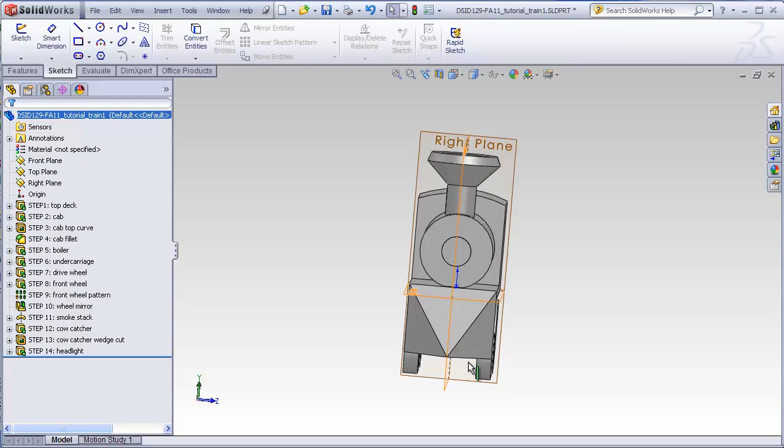This exercise was also designed to introduce you to some options available in these different basic features that you may not yet be familiar with. For example, we're going to take advantage of the fact that the train is symmetrical and build one half of it so it sits in front of the front plane and the other half so it sits behind it.

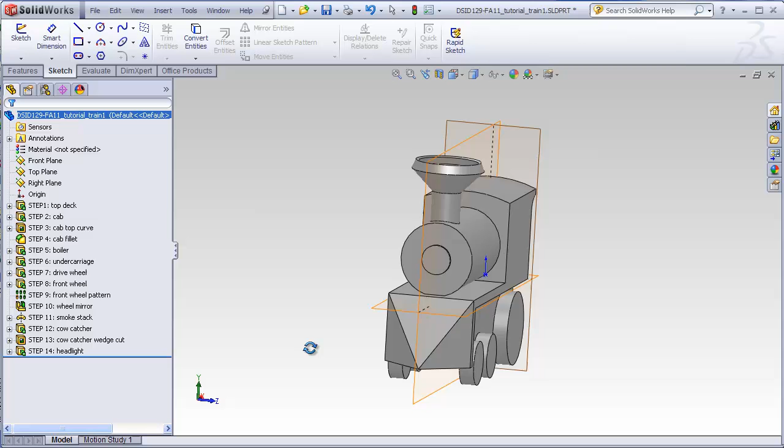This will conveniently allow us to use the front plane as a mirror plane when it's time to make a mirror image of the wheels. To be able to do this, we will have to be using some extrude options that up to this point we have not yet used.

In order to allow us to extrude automatically in 2 different directions, the entire exercise comprises 14 different features, which we could probably do in fewer features, but this exercise was designed to break it up into this many features in order to introduce some key concepts.

Using the rollback bar, I will quickly introduce each step and then go back again and show them in detail.

The first feature is what I'm calling the top deck, and this is a simple extrude with the sketch being made on the front plane. We'll be using a feature called midplane extrusion that gives us an extrusion going in both directions.

The next feature is also an extrude for the cab. This will also go in 2 directions, but we're going to use an option called up to surface to guarantee that this face of the cab lines up with this face of the deck.

And this face of the cab lines up with this face of the deck. The next feature is this top curve, which is made with a cut. It has a unique feature built into it. And then the overhang of the cab has a simple fillet.

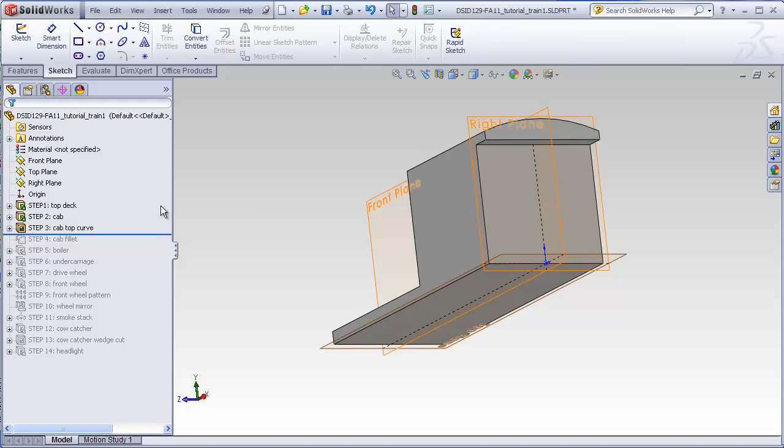The boiler is nothing more than a simple extrusion starting on this face. And then we add another midplane style extrusion to represent the undercarriage.

Extruded from the undercarriage will be a drive wheel and a front wheel, and then we'll pattern this front wheel to get a second wheel.

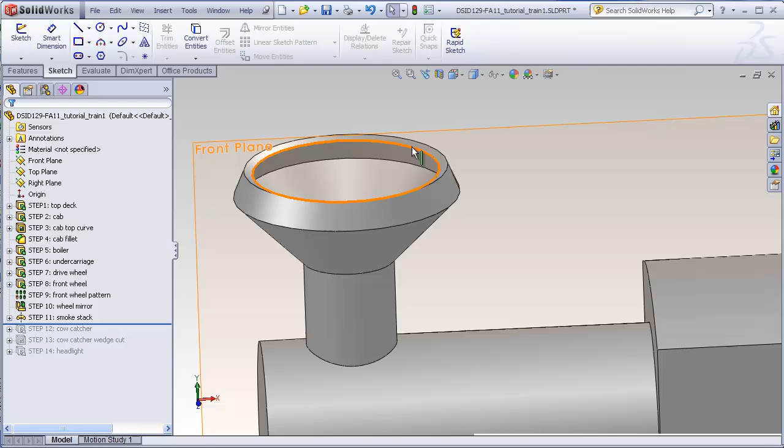All 3 wheels will be mirrored to the other side of the train using the front plane as a mirror plane. The smokestack will be added as a revolve, and what's unique here is we'll use the thin wall option for the revolve in order to create a hollow smokestack.

A cow catcher, a wedge shape, will be added to the front using again the up to surface option. And then from the top we're going to do a cut in order to add this wedge from this viewpoint, and then we're going to finish it all off with a simple extrusion off the front of the boiler to create a headlight. Now let's go back to the beginning and see how each of these were done.

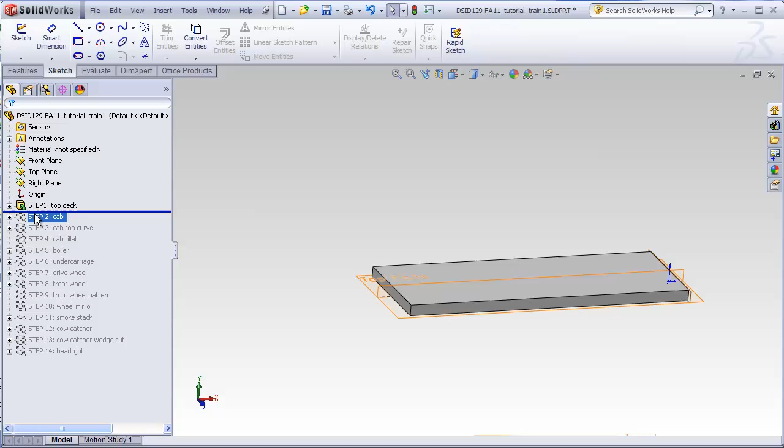The top deck is a sketch drawn on the front plane. This lower corner is aligned with a coincident relation to the origin. You can see in the highlight here that this extrusion is going to be going in both directions.

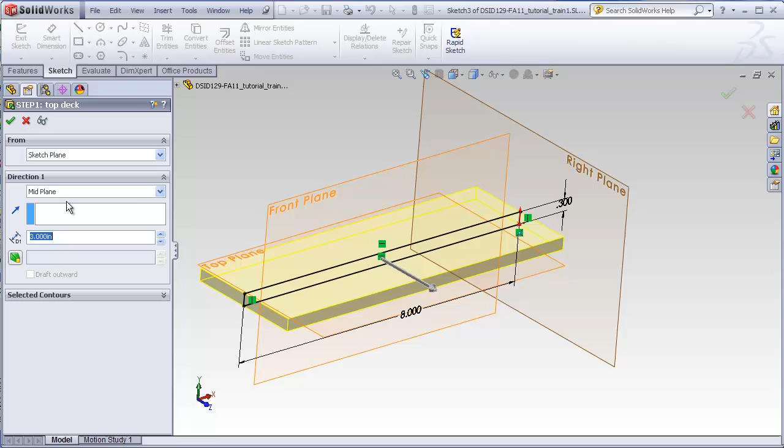Let me show you how that's done. Normally we're used to using a blind extrusion that goes just in one direction. What we're going to do instead is use the midplane option, 3 inches wide, and what that does is extrudes one half of the extrusion in one direction, one half in the other. So the total will still be 3 inches, but one half will go in this direction and one half will go in this direction.

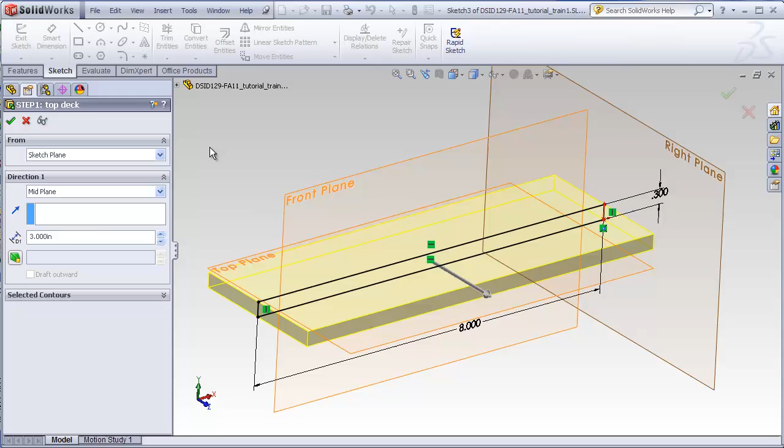The cab is also drawn on the front plane. We want to make sure that this lower corner has a coincident relation to the upper corner of the deck to make sure that these are always in contact here and here.

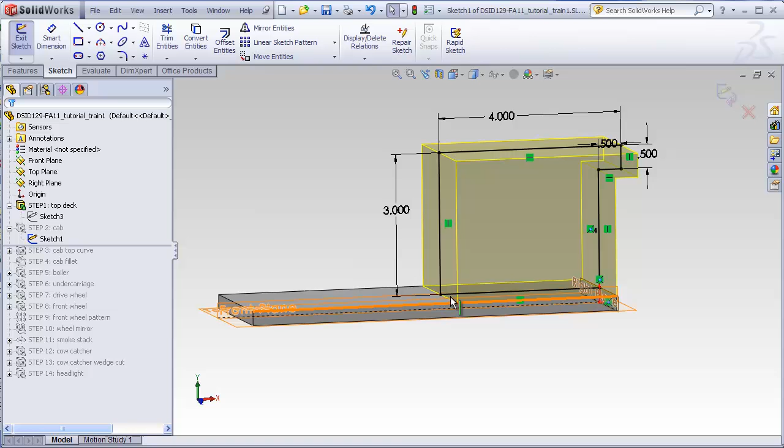One thing you want to be careful of is not to accidentally introduce a midpoint relation right here with respect to the deck, or it will make your dimensions create an error.

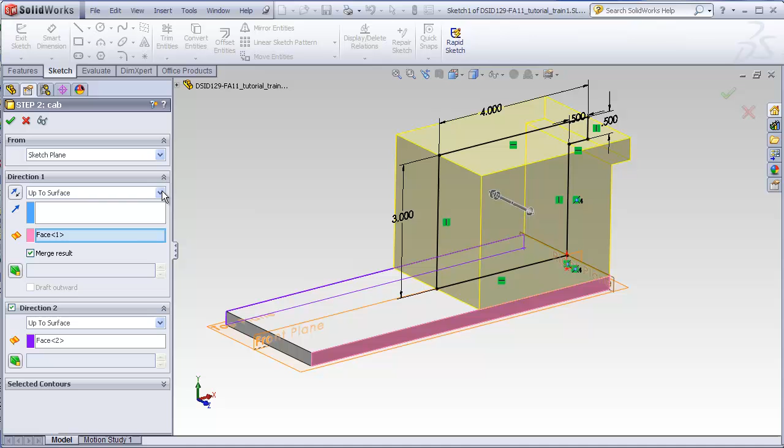Now instead of using the midplane option here, first let me show you what the blind option looks like.

What we want to do is extrude this up to this surface here, and extrude in a second direction going to this surface here. That guarantees that no matter how wide the deck is, the upper cab here will always be the same width.

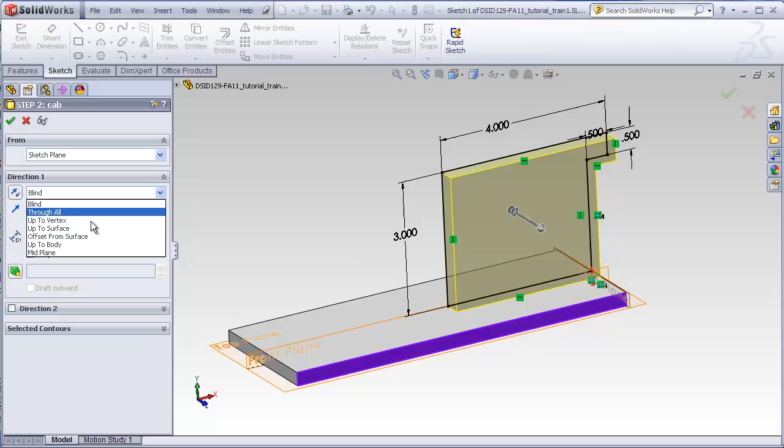Once again, we'll take it out of the blind option. In this case, we'll go up to surface. We're going to select this surface of the deck. We see that now the cab is going right up to this surface regardless of what this dimension happens to be. Here we see only half of the cab has been created.

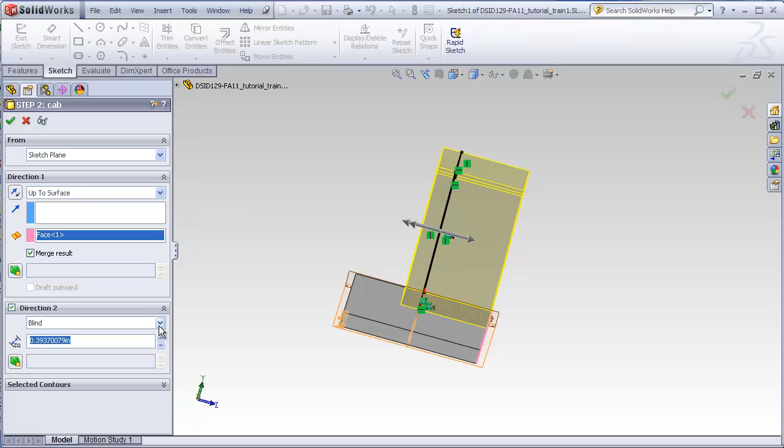The normal default is to keep direction 2 turned off. We're going to check direction 2 to activate it. It defaults to blind also. We're going to change this to up to surface, and we're going to click on this surface of the top deck in order to make sure that this side of the cab is also in alignment with this side of the deck.

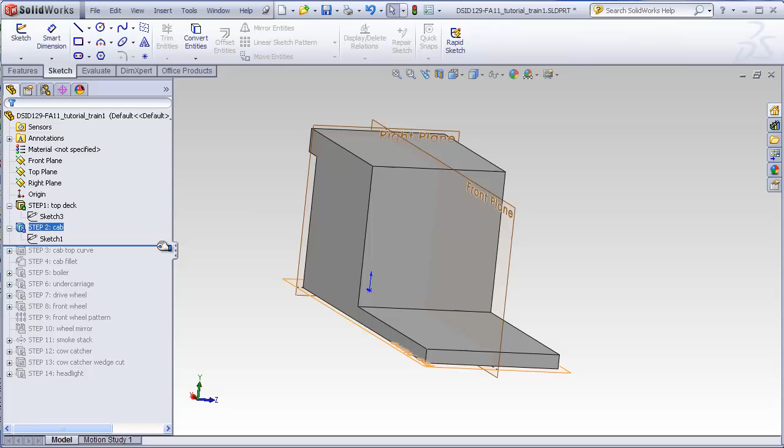The next feature is cutting away this top curve. This is pretty straightforward with one exception.

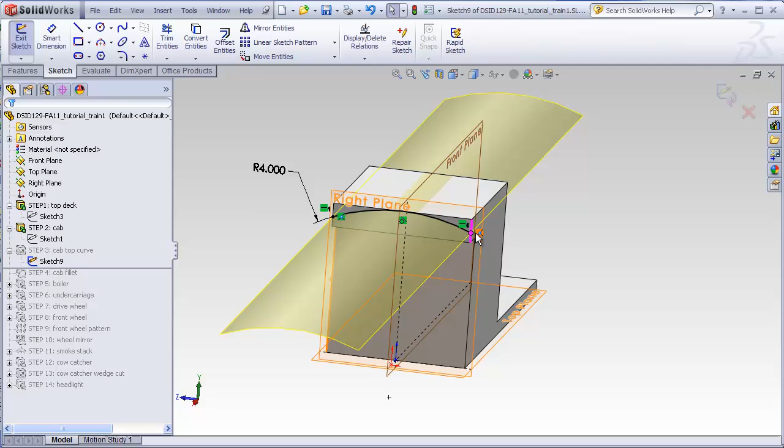I'm going to draw a sketch on this face. What's different about this from what you're accustomed to is we're going to just draw a single open arc, and we're not going to make an enclosed two-dimensional profile like we normally do. We can do cuts this way, but when we do a cut that is not an enclosed profile, Solidworks automatically defaults to doing a through-all option going in both directions. We also have to tell Solidworks whether we want to remove the material to this side of the cut or to this side of the cut. So I'll show you how that's done.

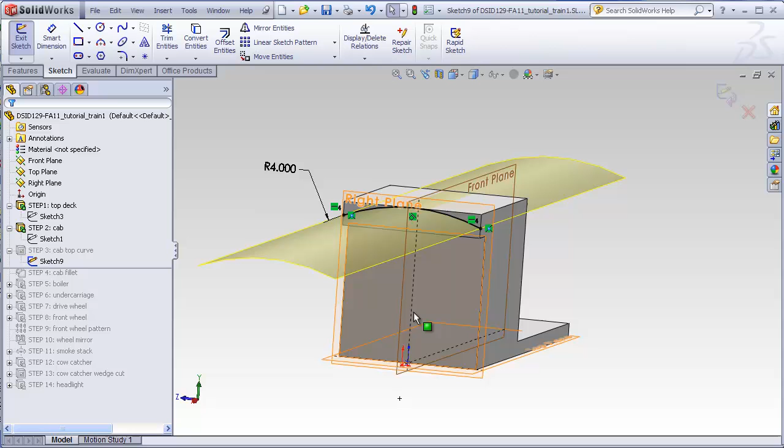I will just redo this cut here. I'll roll back, click on this surface, select sketch, and I will use the 3-point arc here. The easiest thing to do in this case is just click 3 different places. Don't worry about it being aligned with any of the features yet.

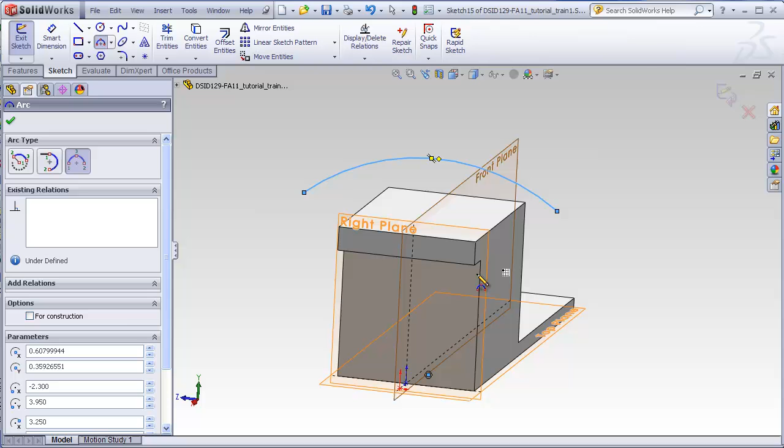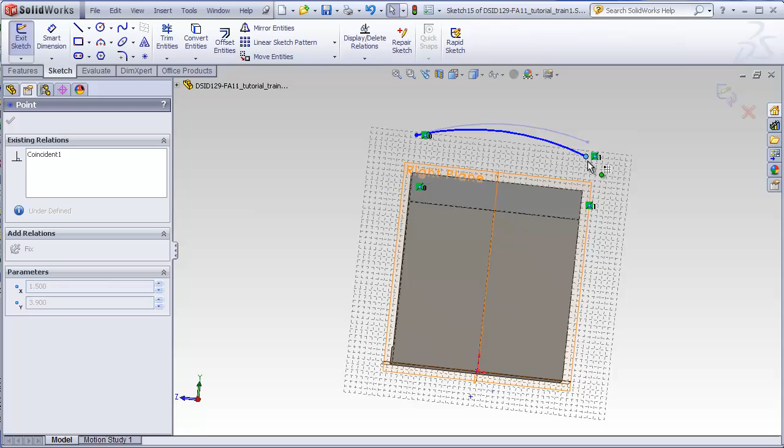Now what we're going to do is add a coincident relation between this edge and this point, and a coincident relation between this edge and this point. You see it's up high in the air here, so I'm going to drag this down. Be very careful to stay away from the middle of this segment, or you might accidentally add a midpoint relation, which you don't want to do. If you accidentally do that, just delete the relation and make sure you only have a coincident relation.

The last relation we want to add is a tangent relation between this arc and this edge here. That will mean that this arc just barely touches this edge. I want to remind everyone that the easiest way to add a relation is to hold your control key down and then select the 2 items that you want to make a relation between. This automatically opens up the Properties Manager for relations, and here we see the only feasible one is tangent.

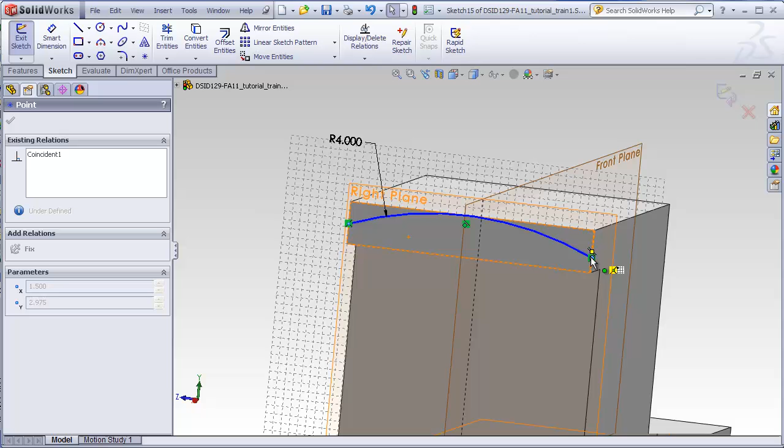I'm going to add a 4-inch radius to this arc. We see that this is still blue, meaning that something isn't quite fully defined. Whenever you have a question as to what's causing something to not be fully defined, what you should try to do is just grab a point and see how you can drag it around. That sometimes gives you a hint as to where the problem is. So we can see that we can make this arc seesaw up and down. That tells us that somehow these endpoints have to be constrained in a vertical direction.

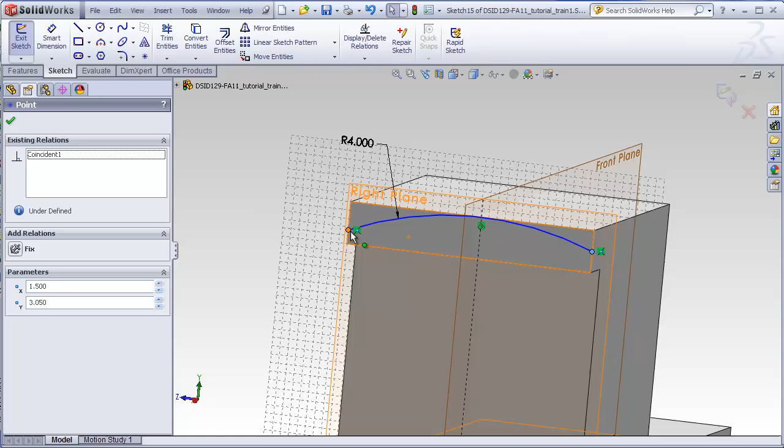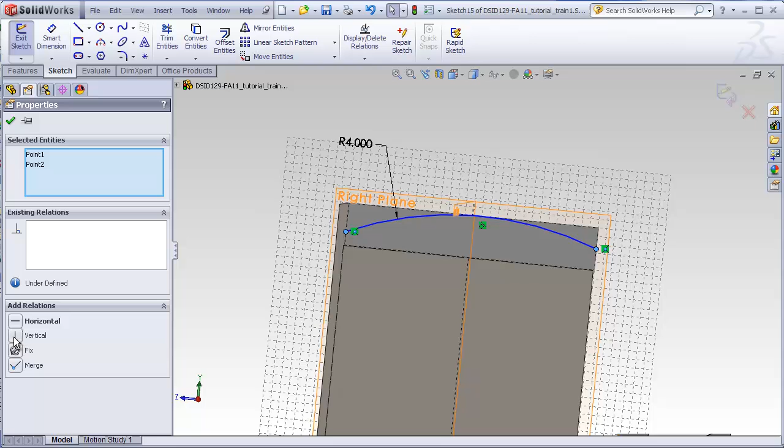Not only that, we want to make sure that this—see, I accidentally added a midpoint—we want to make sure that this point is at the same height as this point. To make sure these 2 points are at the same height, I'm going to add a horizontal relation with them, which is the same as putting them on a common imaginary horizontal line. So once again, I'm going to pre-select the points holding down Control, choose horizontal. That's brought the points across, directly across from each other, and it's turned the line black. Now I'm going to use this line to make a cut.

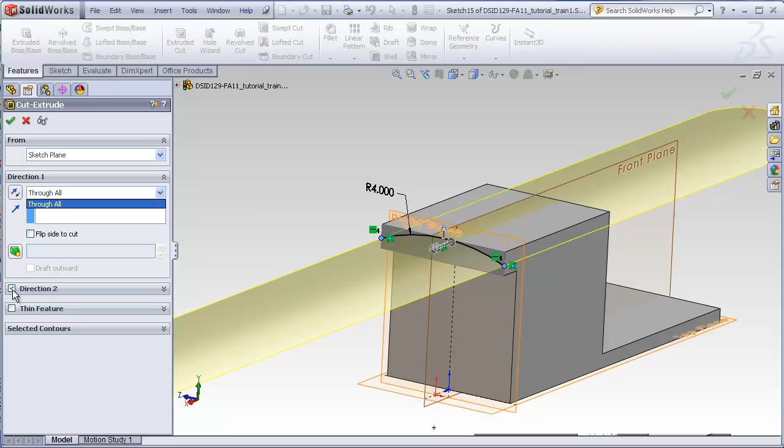Go to my Features tab, Extruded Cut. Here we see that the blind option isn't even available. In fact, the only option available now is Through All, and it's automatically activated Direction 2, which also is in the Through All state. Here we have an arrow telling us which side this material is going to be cut away. If I toggle this with the Flip Side to Cut option, the arrow flips up and down. We want the arrow pointing upward to get rid of this material. If we make the wrong choice, we can always go back and re-edit the feature and change it.

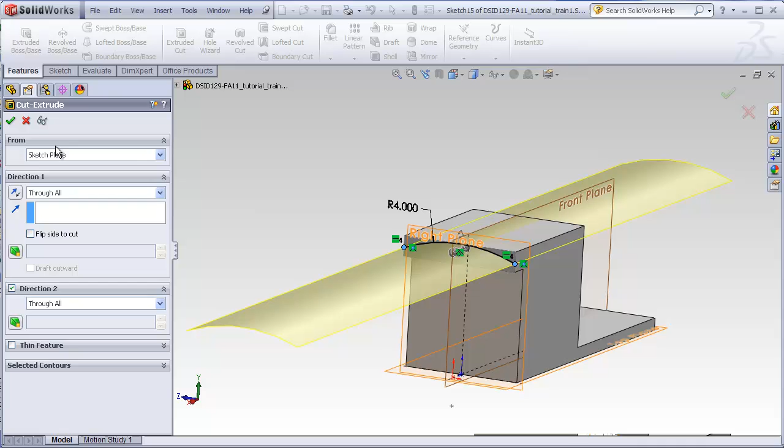So here we see we have a nice curved cut, and this is a smooth curve with no flats or extra material left over because of the tangent relation that we used here.

The next feature is just a simple fillet put into this inside corner. No mysteries there.

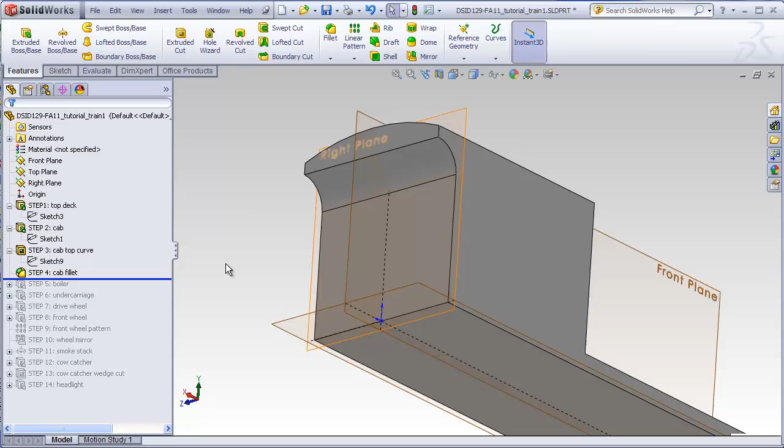I'm going to revolve this around so we can view the train from this direction, and we're going to add the circular boiler as an extrusion starting on this face and extruding in this direction.

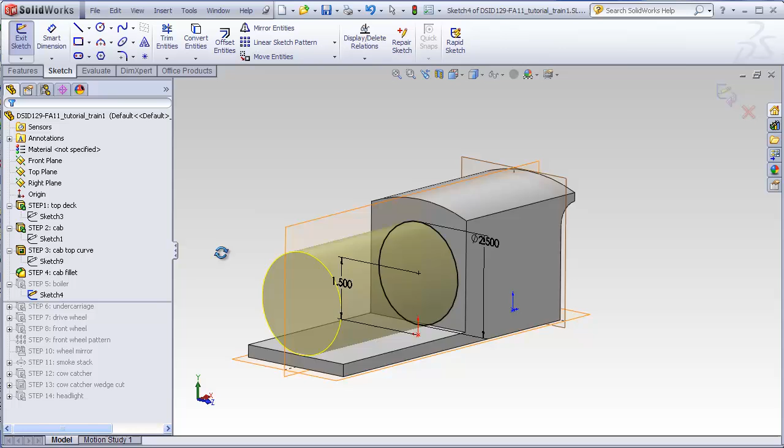So just roll this forward, edit the sketch. We see that it's nothing more than a round circle. In order to keep it on the center of the train, we have a coincident relation between the center of the circle and our front plane.

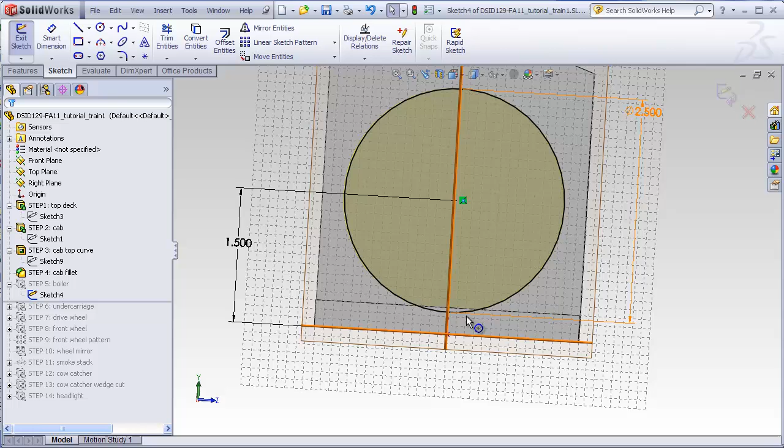The circle is 2.5 inches in diameter, and it's 1.5 inches above the origin, which is the same as 1.2 inches above the top of the deck. You'll notice that I purposely have a little bit of an intersection between the circle and the top edge of the deck. This will guarantee that this boiler is not just barely touching the deck. If it does, we'll have a little bit of a problem.

Avoid using the tangent command in this case.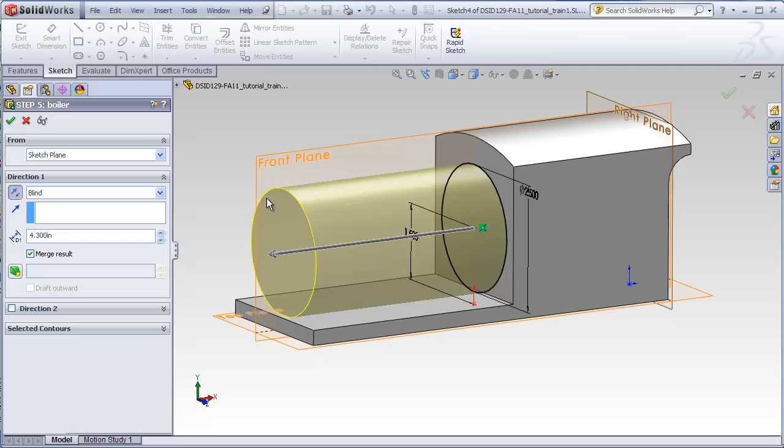So this is one case where we actually are going to use a blind extrusion. It's just 4.3 inches away from the front face of the cab.

The next is the undercarriage. This is what the wheels will be attached to. And this is a simple rectangle.

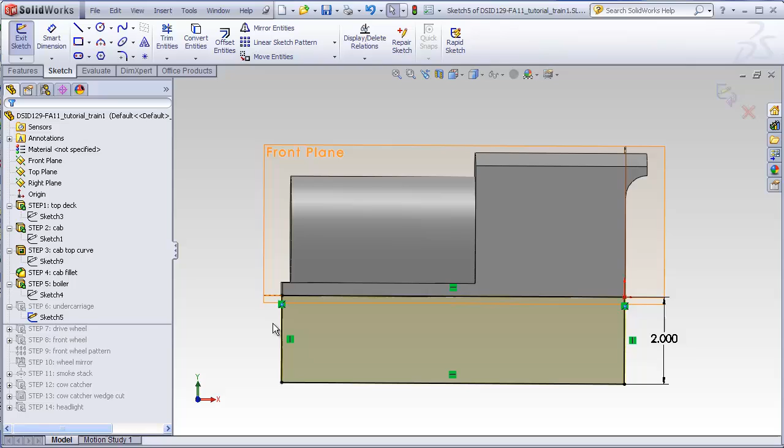The key thing is to also make a coincident relation of this upper right corner to the origin and another coincident relation of this upper left corner to this lower corner of the deck. This will guarantee that the ends of the undercarriage line up with the deck at both ends, and that this top edge of the undercarriage is always in alignment with the bottom edge of the deck.

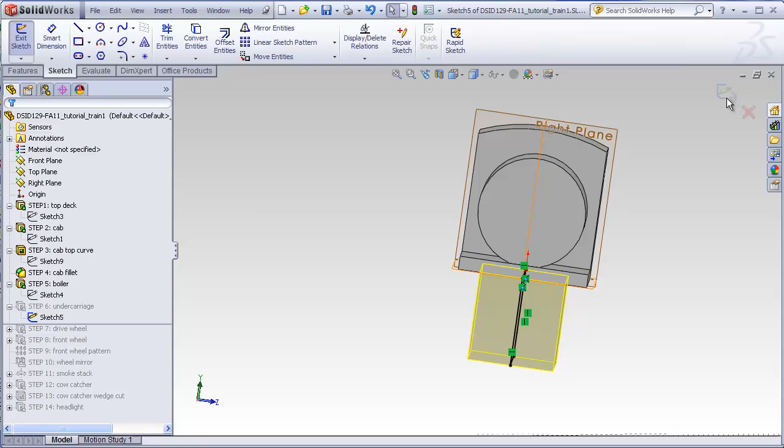Once again, we're going to use the midplane option when extruding, only this time we're just extruding 2 inches wide. I'll show you what that looks like. So here's our property manager for the extrusion, 2 inches wide, midplane option. So we intentionally do not want the undercarriage to be the same width as the cab and the deck because we need to fit some wheels under here.

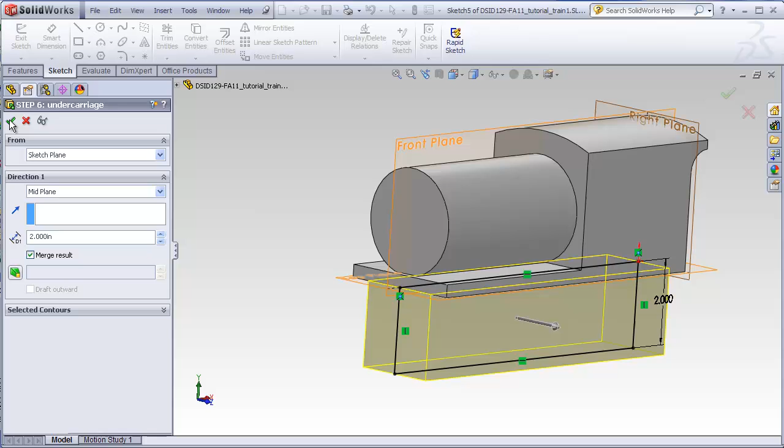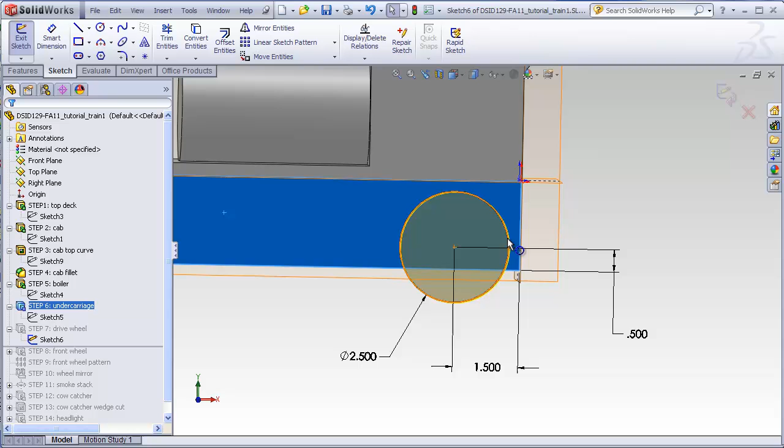The drive wheel is nothing more than a circle that is drawn on this face of the undercarriage. And this is a blind extrusion of 1/2 inch going this direction. It's dimensioned with respect to the end of the undercarriage and the bottom of the undercarriage, and has a 2.5 inch diameter.

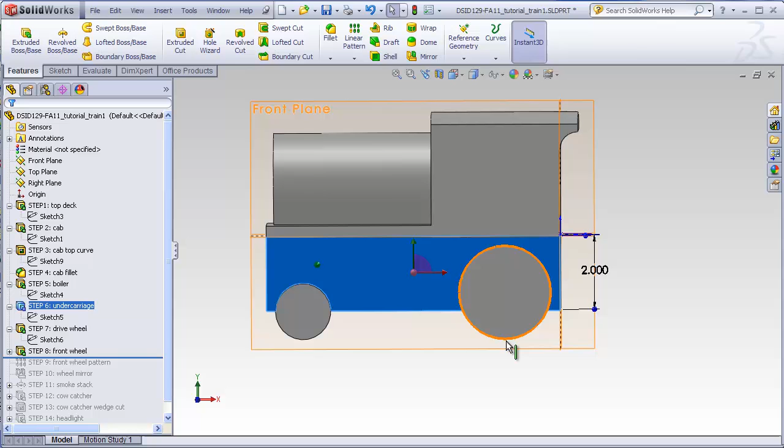The front wheel is almost as simple. It's also drawn as a sketch on this face of the undercarriage. One thing we have to make sure of is that the bottom of the front wheel is in alignment with the bottom of the rear wheel. To do that, in the sketch, what we want to do is add a construction line that is tangent both to the bottom of this new front wheel we're adding and the bottom of the rear wheel that was already created. And then this line has to have a horizontal relation on it.

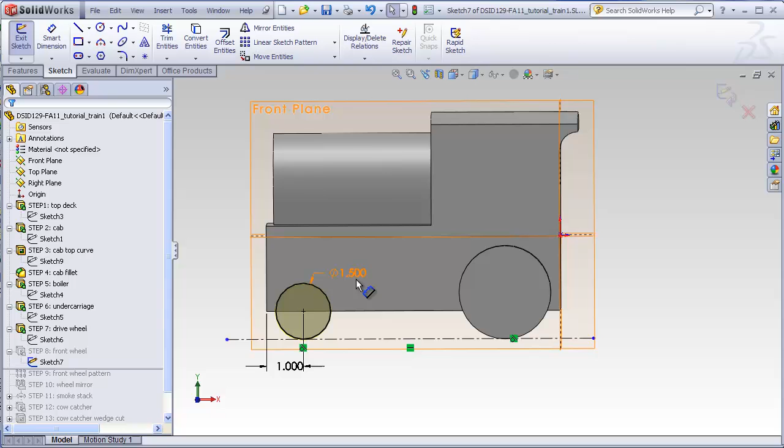And then the center of the wheel is dimensioned with respect to the front of the undercarriage and has a diameter of 1.5 inches. This is also just a simple blind extrusion.

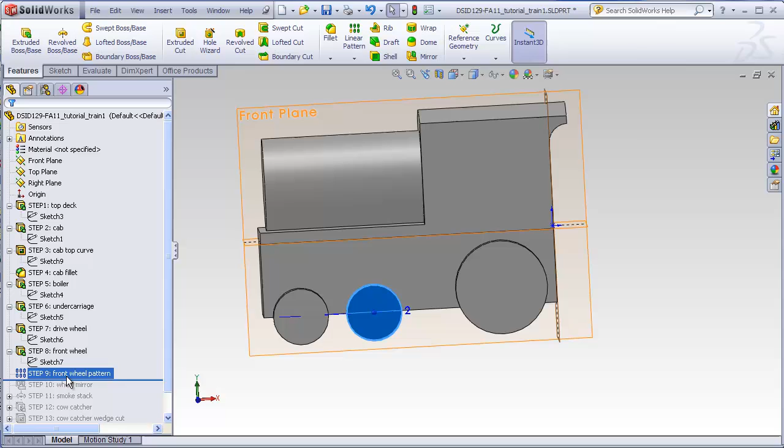Could have just as easily drawn a second wheel, but for fun we're going to pattern this. So what we want to do is give a direction we are going to pattern in and the distance between the center lines of the wheels that we're going to pattern. So go ahead and pattern this. If I highlight it, we see that we want a total of 2 wheels, dimension of 2 inches apart.

I'll open up the PropertyManager on that. You can see the edge that was chosen for the direction was this bottom edge of the carriage. This determines that the pattern will go this way and not, for example, this way. Here we selected 2 inches, which is the distance between the wheels, and here we selected a total of 2 instances. Remember that the first instance is always the original one. In this case, the second one is the patterned one.

In this box here, we've actually selected the item that we are patterning, which is step number 8, the front wheel.

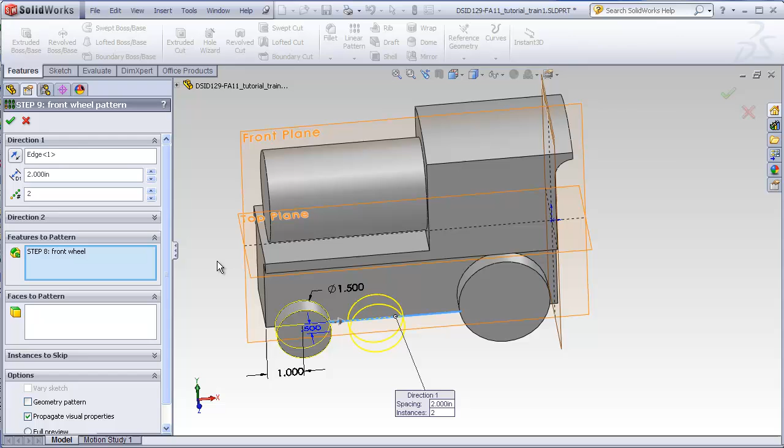So now we have 3 wheels. We don't want to go through all the work of making them again on this side of the train. We're going to take advantage of our mirror command to do a lot of work for us. Mirror command can be found up here, or it can be found under the linear pattern grouping. Linear patterns at the top, and when we open this up, mirror is also found here.

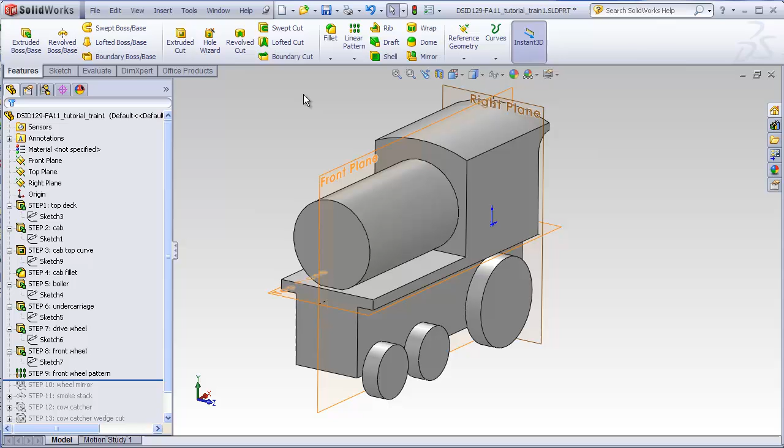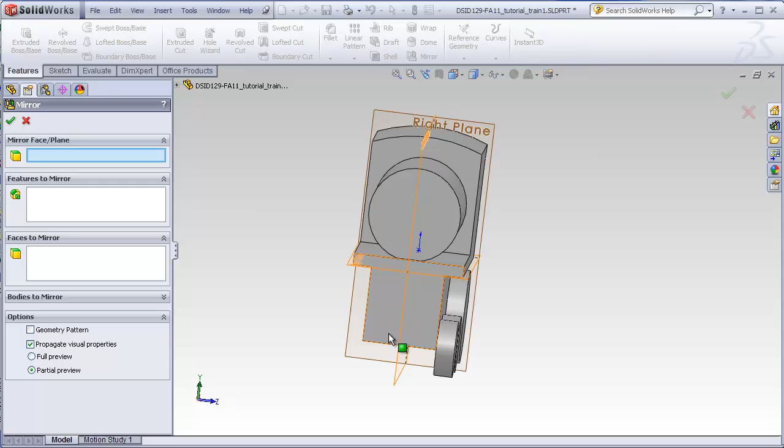To do the mirror, we have to tell SolidWorks what we are going to mirror about. So imagine that this is our mirror and that these 3 wheels are going to be reflected in it. The distance between the wheels and the mirror will be the same distance that the mirror image will be copied from the mirror plane. So if these are 1.5 inches away on this side, the mirror image will be 1.5 inches away on this side.

So in the mirror face or plane, we will select the front plane. Now it's highlighting the features to mirror. We're going to choose this wheel, and this wheel. You see it's highlighting to the other side, and we just complete the command.

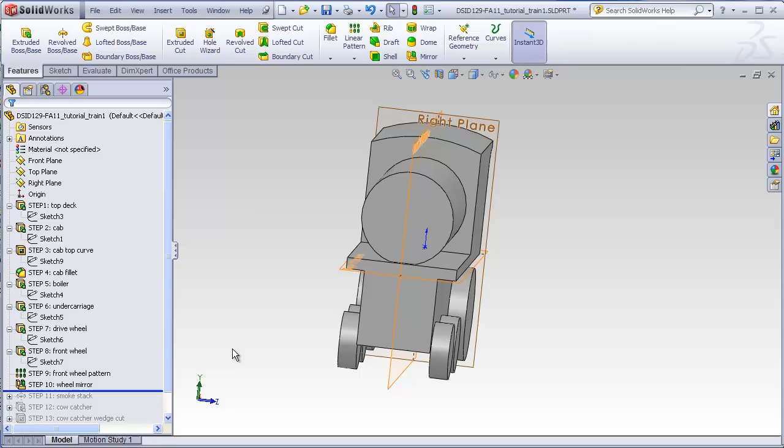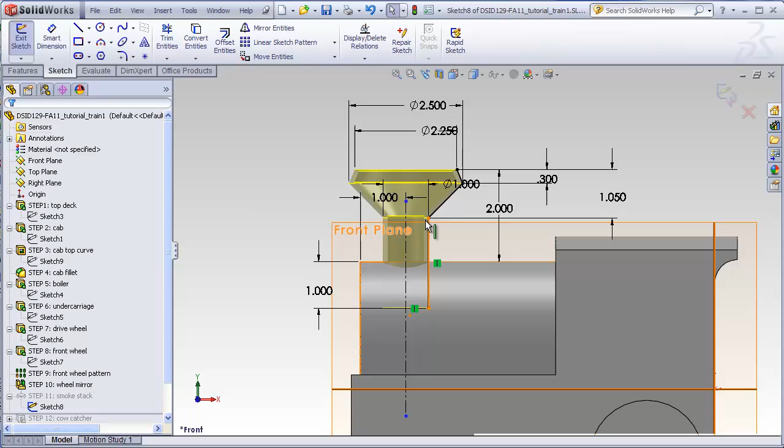The smokestack is revolve. The sketch for it is also drawn on the front plane. The sketch for this has 2 primary elements. One is the central axis that the revolve is going to be spun around, and the other is the actual outer profile that's going to give us the shape of the revolve.

In this case, we want a smokestack which is hollow, so it's open on the top. This can be open on the bottom. We only have to draw 1, 2, 3 line segments to achieve that. We do not need a horizontal line segment to cap it off because we want it open on the top. We do not need a horizontal line segment on the bottom, nor do we need a solid line segment on the center. It's important that this line be a center line.

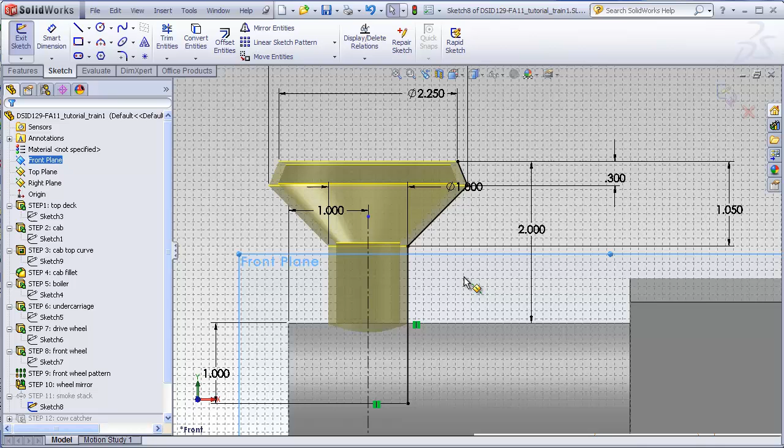I'm going to delete a few of these dimensions and demonstrate how we can take advantage of dimensioning something which we know is going to become circular after the revolve.

So here is the outer perimeter of my smokestack, and I want to dimension what the diameter is going to be of the bottom portion of the smokestack. If I dimension from the center axis out to the edge of the smokestack and drag in this direction, it tells me 1/2 inch. If I drag in the opposite direction, it tells me 1 inch. It automatically doubles the dimension for me to tell me what the final result would be if this was revolved. That way I don't have to do any math in my head.

I can add another dimension here, from here to here, and then drag to this side, and we get 2.5 inches. And then finally, from here to the center line, again you see 1 1/8 inches, and if we drag to this side, it's 2 1/4.

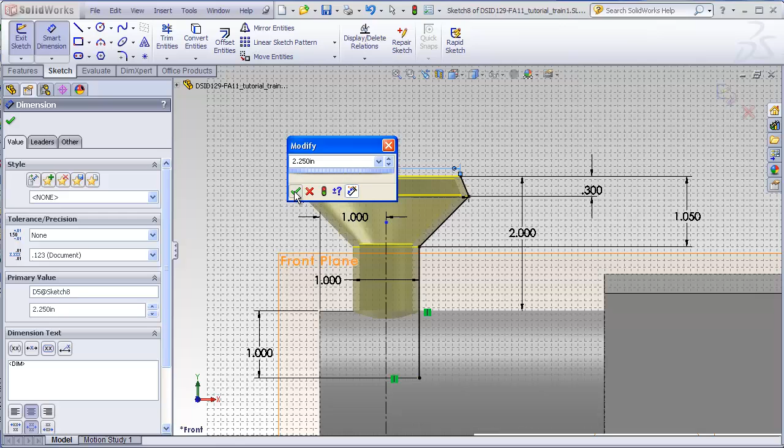I'm purposely bringing the bottom of the smokestack a little bit below the top of the boiler because of the fact that the boiler has a curve to it. I want to make sure that the smokestack is completely buried into the boiler without any edges hanging out.

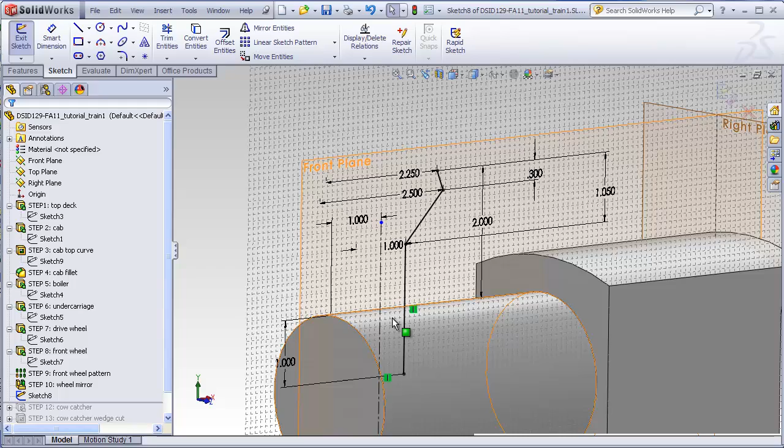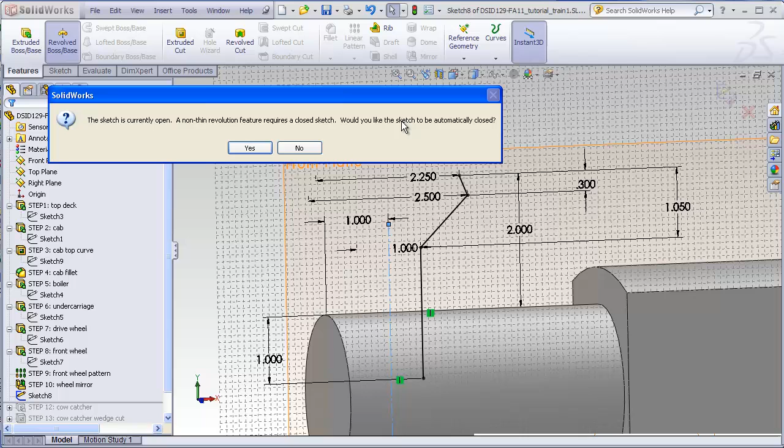Now let me show you the options we will use for the revolve command. Go to Features, Revolve. It will tell us that the sketch is currently open. This is because we did not create an enclosed two-dimensional profile. This is intentional. It says, would we like the sketch to be automatically closed? In this case, we are going to say no.

Under these conditions, SolidWorks assumes you're going to have to make what's called a thin feature. It's okay to make a non-enclosed two-dimensional profile, but you have to add thickness to it in order to get the same effect as an enclosed profile. SolidWorks lets you choose what the thickness of this profile should be.

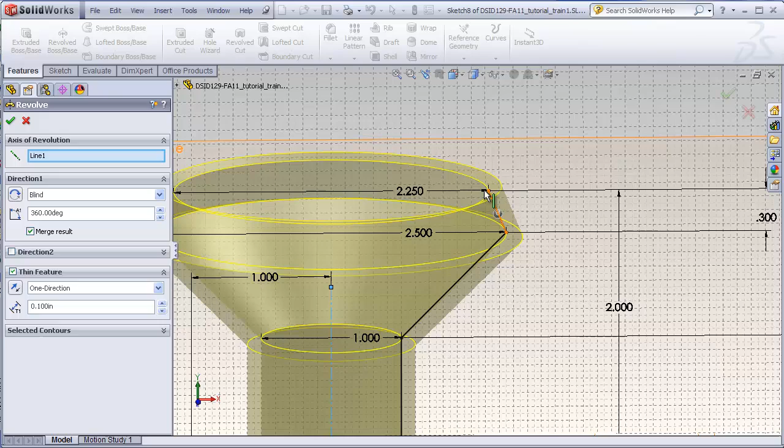In the highlight here we can see my profile. SolidWorks has automatically added thickness to it at the same time that it is revolving the profile. It's also assuming, because there's a center line in my sketch, that the profile is going to be revolved around that center line.

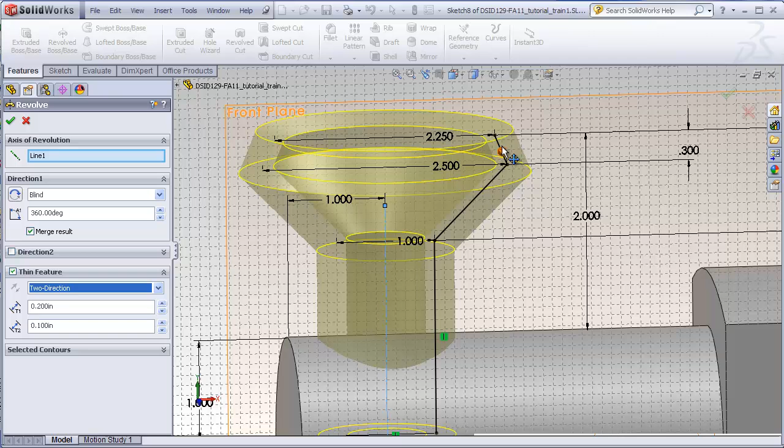You can see if I increase this number, the thickness of the revolve increases. We also have a one direction option activated, and if I toggle this, the thickness goes inward instead of outward. I have other options such as midplane, where half the material goes inward and half outward, and two direction, which lets me have a different amount going outward than going inward. We are going to use one direction, make sure it goes inward, and make it 0.1 thick.

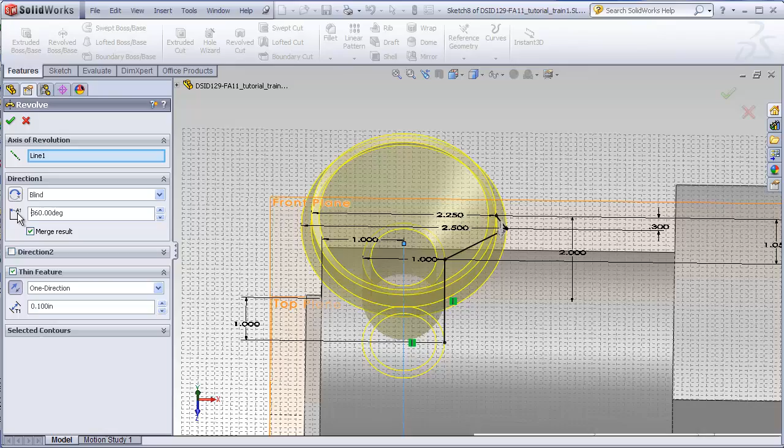We even have an option as to how many degrees we want this revolve to go around. The default is 360 degrees for a full circle. If I wanted to, I could make that something else, like 180 or 90 degrees, or anything I desire. We're going to make that 360 to make our complete smokestack.

Finally getting close to the end.

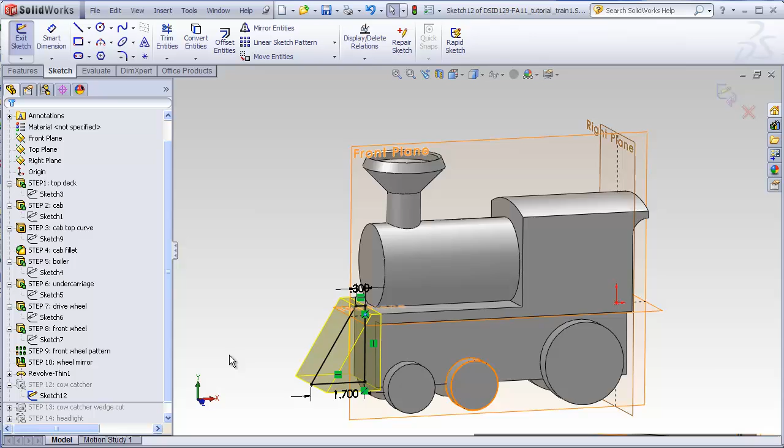Next step is to add our cow catcher. This is nothing more than an extrusion, a trapezoidal shape. It's got a coincident relation to this upper corner of the deck and the lower corner of the undercarriage. It's often easy to draw a trapezoid like this by first drawing a rectangle, then taking this vertical line and deleting the vertical relation on it, which allows you to make this line go at an angle.

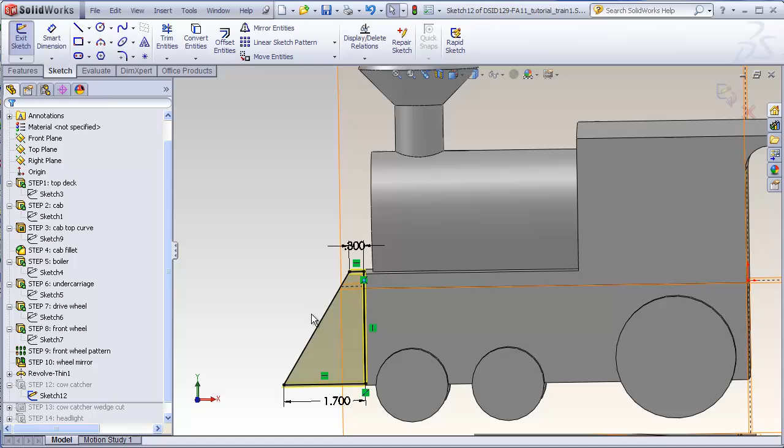The options on this are up to this surface and up to this surface, to guarantee that the width of the cow catcher is the same width as the deck and the cab.

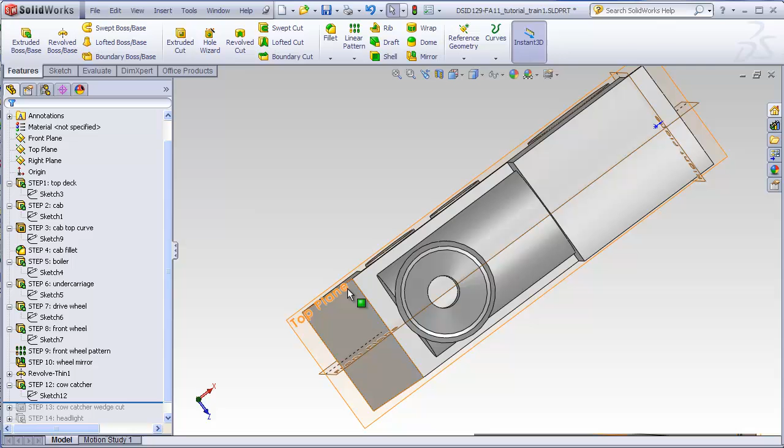To finish the cow catcher, we want it to also have a wedge shape when viewed from above. On the top plane, we will draw a simple sketch. It's just two lines going from this corner to the midpoint of the front edge of the cow catcher, and to this corner here.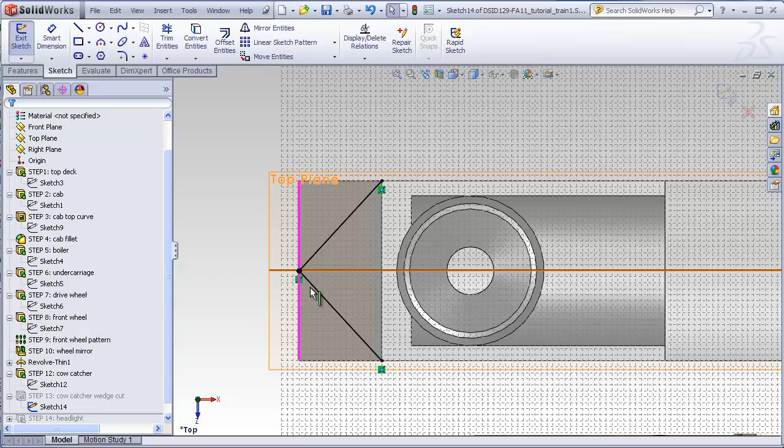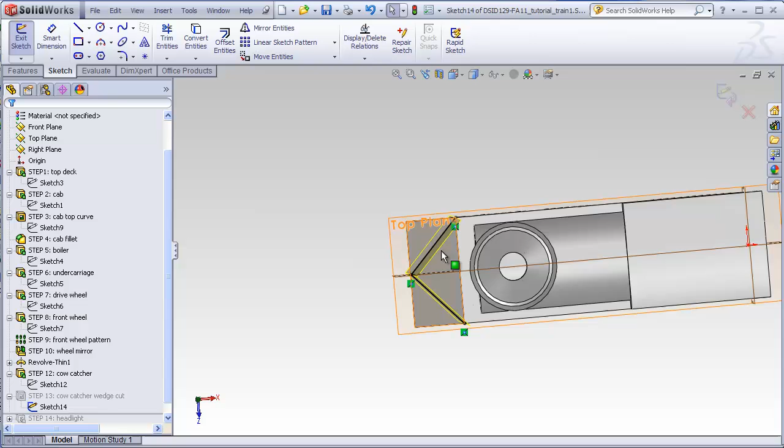We'll use the cut command again, and because this is an open profile, not an enclosed two-dimensional profile, it will automatically default to through all in this direction and through all in that direction. We want to make sure the cut goes to this side, not this side, in order to remove these two triangular areas. Here we see the Property Manager has automatically defaulted to two directions, through all in both cases, and the arrow is flipped to this side to cut to the proper side.

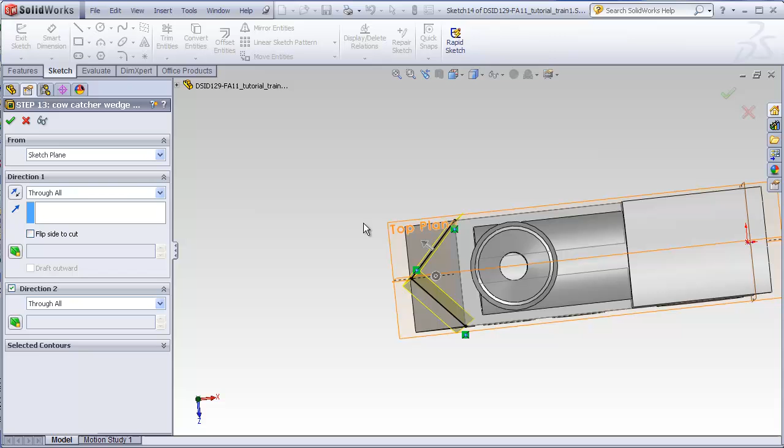Finally, we're down to the last step, and this is probably the easiest: just the headlight on the front of the boiler. Just a circle, which can be made concentric to this edge of the front of the boiler and extruded outward.

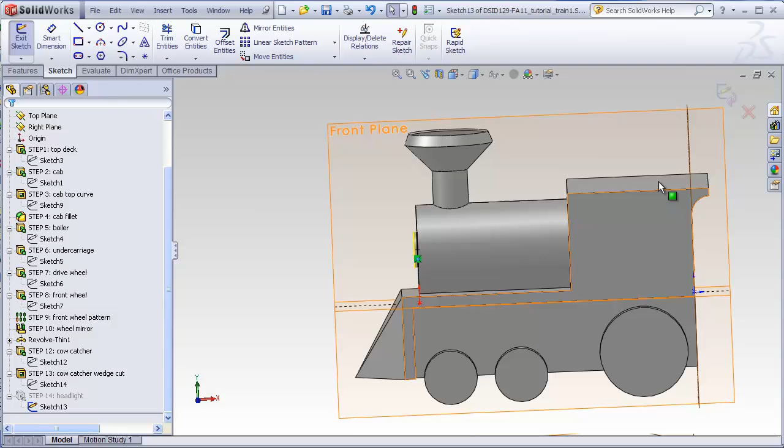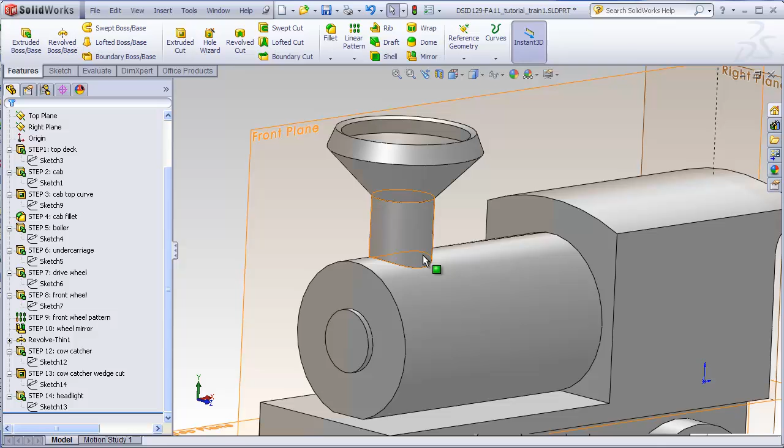And that's all of it. A couple things to notice. Once again, the bottom of the boiler should come a little bit below the top surface of the deck, so you see we have this little flat area as a result. Also, because we purposely made the smokestack come down below the top of the boiler a little bit, that guaranteed that the smokestack is completely intersecting with the boiler, and you can see how it's wrapping over the top of the boiler.

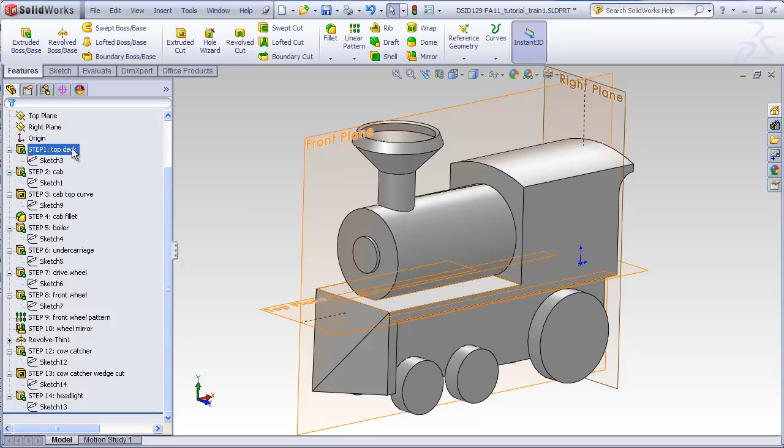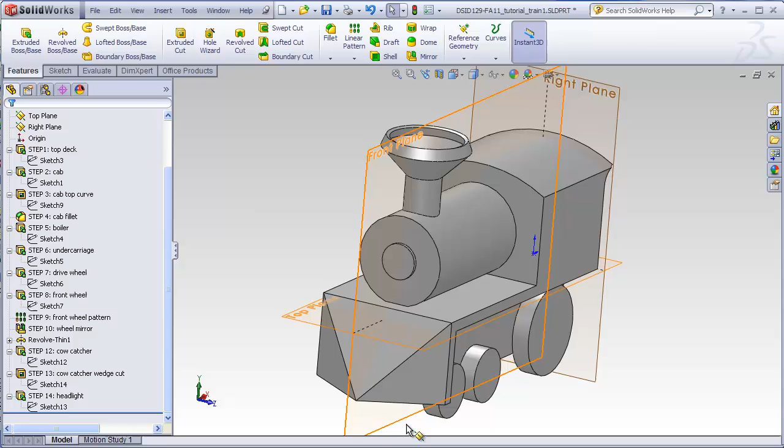Finally, I'm just going to demonstrate here: if I take the top deck, which has a 3-inch width, and modify this width to make it 4 inches instead of 3, then hit the rebuild button, we see that not only did the deck get wider, but because of the up-to-surface feature we used for both the cab and the cow catcher, those features get wider at the same time in order to stay flush all along the side. The undercarriage, though, remained at its original 2-inch dimension, which makes the wheels look more tucked under than before.